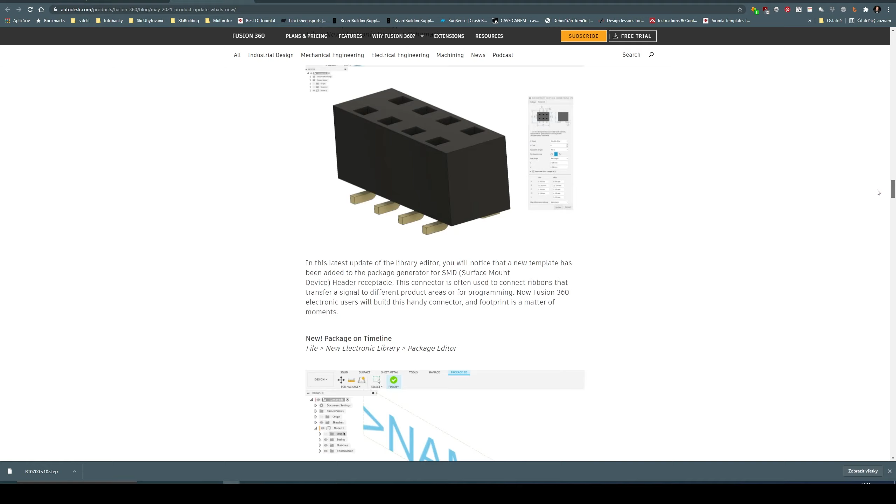Autodesk released a new update yesterday, 24th of May 2021. There's a new feature called machine simulation, which can be turned on in the preferences. In this video I would like to show you how to set it up for the WorkBee CNC machine.

So let's try to do it. What I got here is version 1 of Ooznest version 1 WorkBee. You can get this file from Thingiverse. It's just how it opens up after importing it to Fusion.

First, let's try to get rid of everything we don't need. Basically almost all of it. We don't need the plates. Just take it a step at a time. We can keep the plates, but definitely get rid of the nuts and bolts. Wheels we can keep.

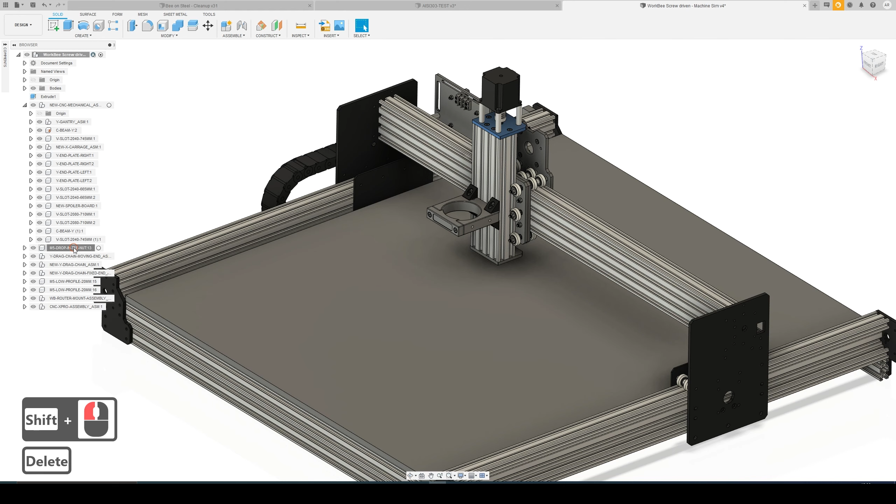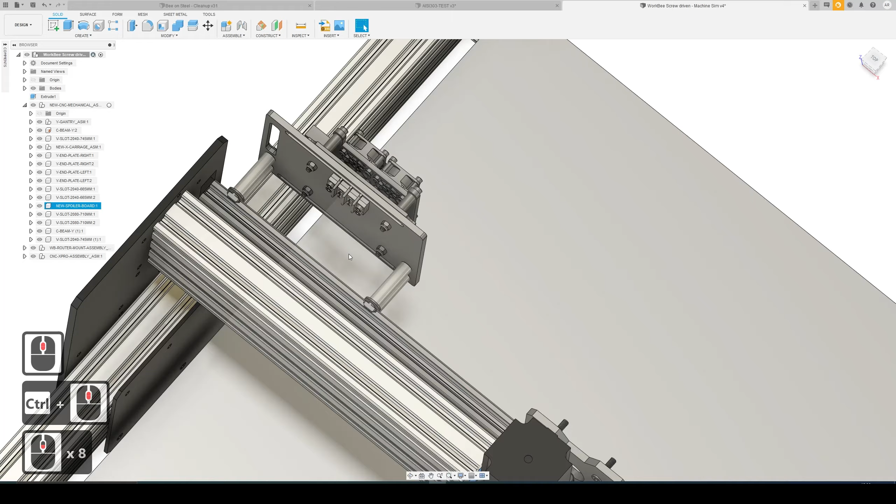V-slot, okay, and we can keep this. We don't need the drag chain or the bolts. Now, I guess the controller model is also not important for the simulation, so let's just get rid of it. So, the x-axis, some more wheels to get rid of.

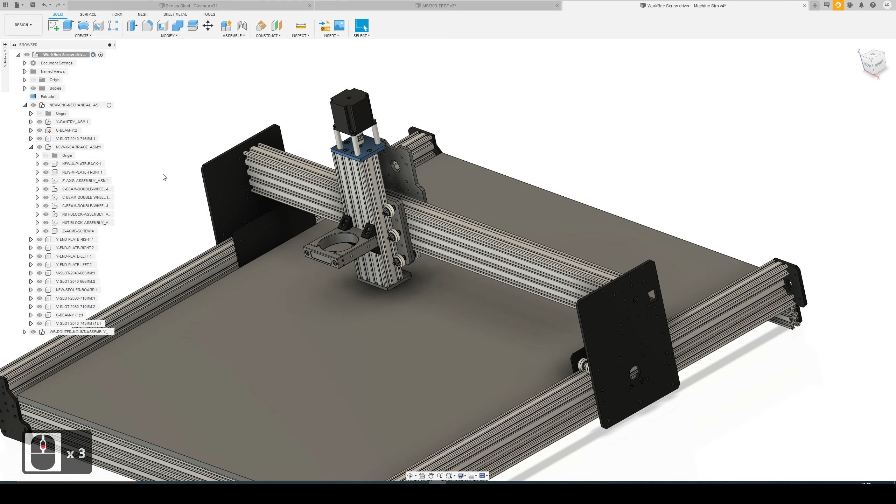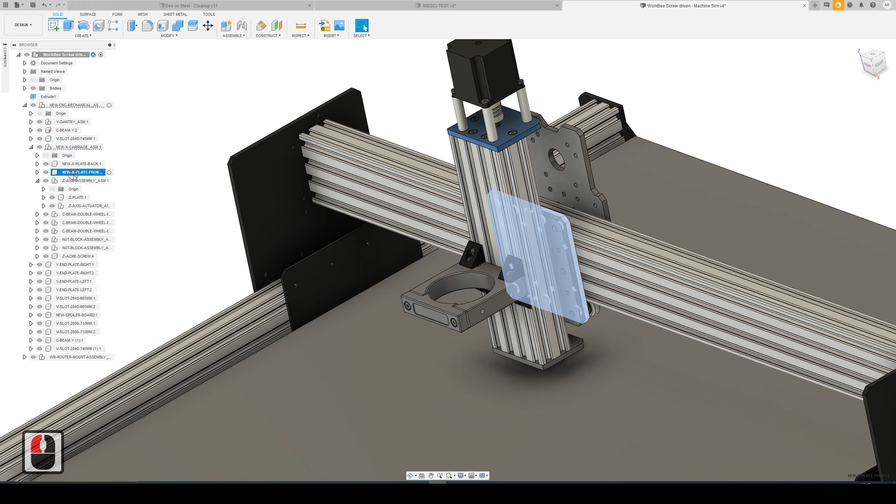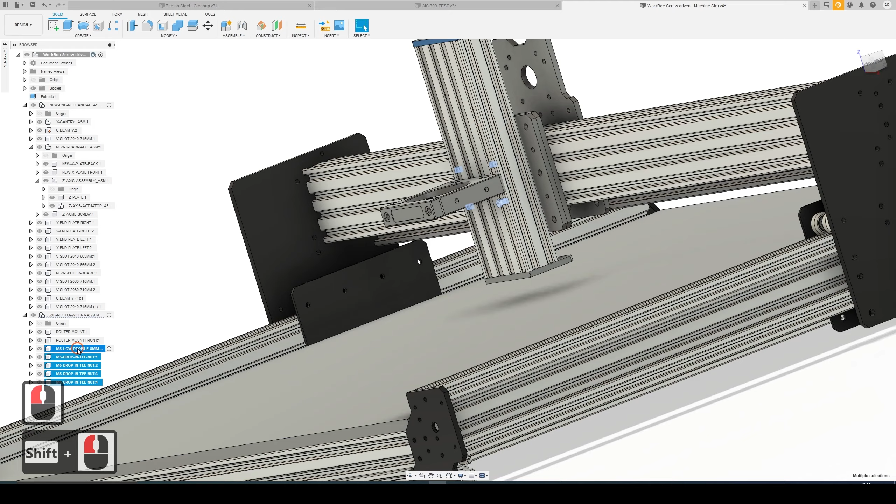This Z-axis assembly is the same. Don't need the nut blocks. More wheels. Okay, so let's ditch the bolts and angle corners on the router mount. Yeah, this should be okay. Oh, some more bolts here. Come on.

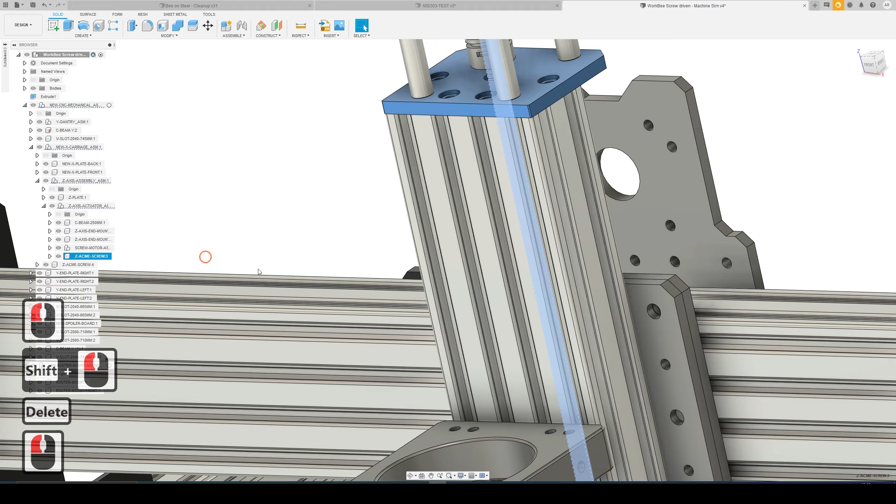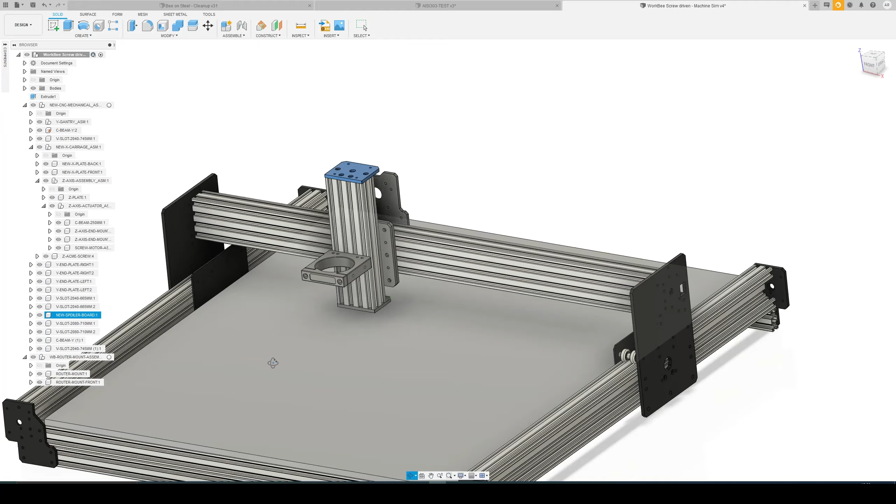Yeah, we don't need the bearings. Screw. Actually, don't need the coupler, or the motor, as it can't get in the way of the part. So, okay, looks good.

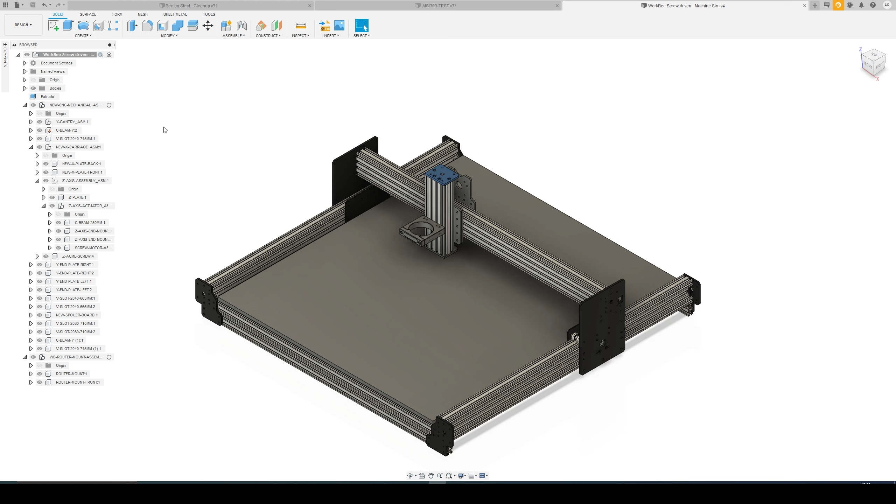Let's save this. So, with this, let's try to move it into the homed position, which would be, I guess, most people use the back right top. So let's see how we have this carriage, router mount.

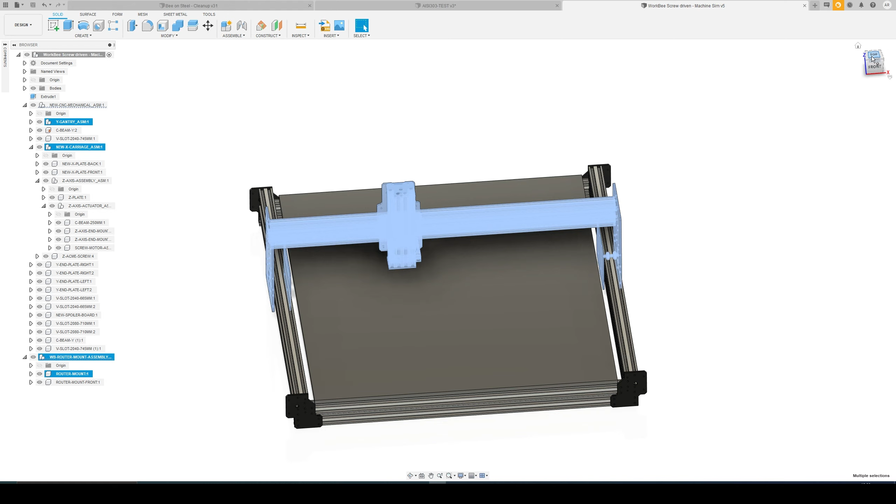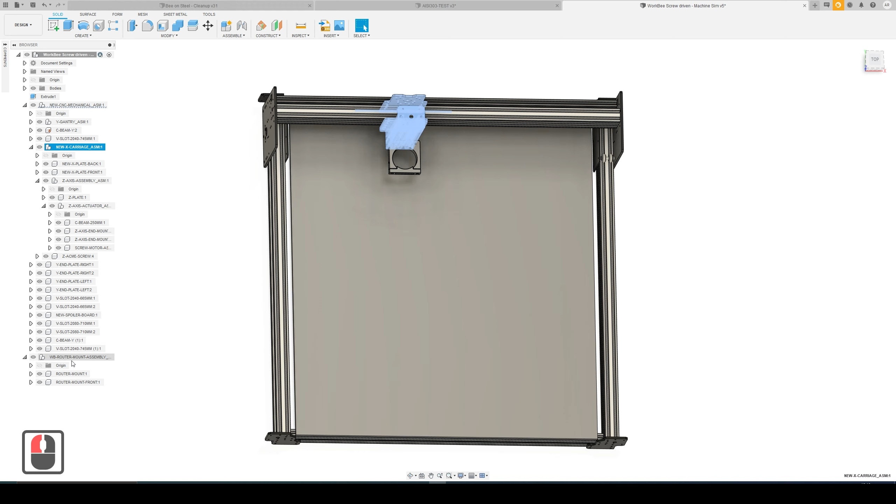So let's go all the way to the back. Now the x-axis, the router mount. Oh, let's move it right here. Okay. And it's just a plate.

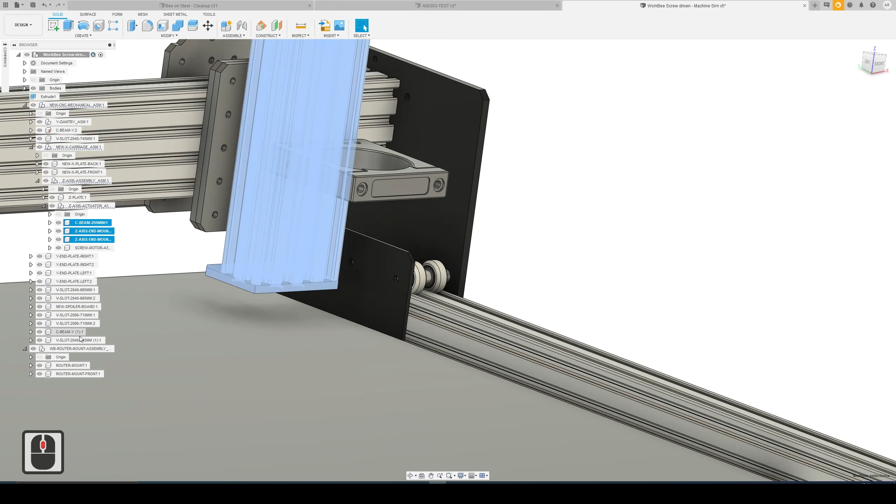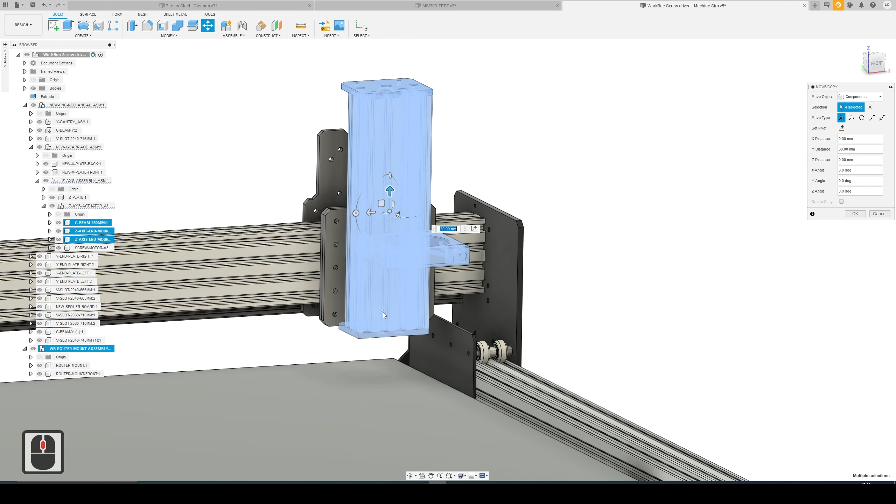This and router mount, let's move it up. Let's say like this. Oh, maybe it would be good to keep some wheels there for reference, but no problem, this looks good.

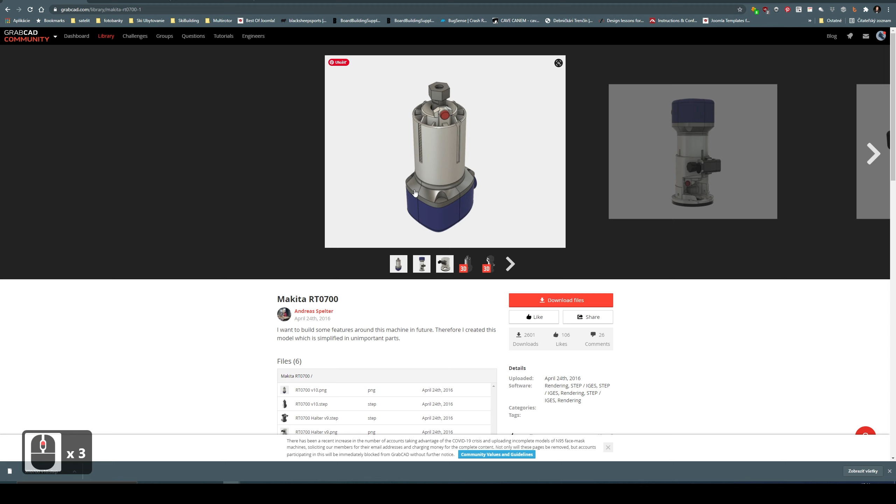Okay, now we need a zero. We need a router, so let's use a Makita RT0700 from the GrabCAD. I already downloaded it, so we can open it.

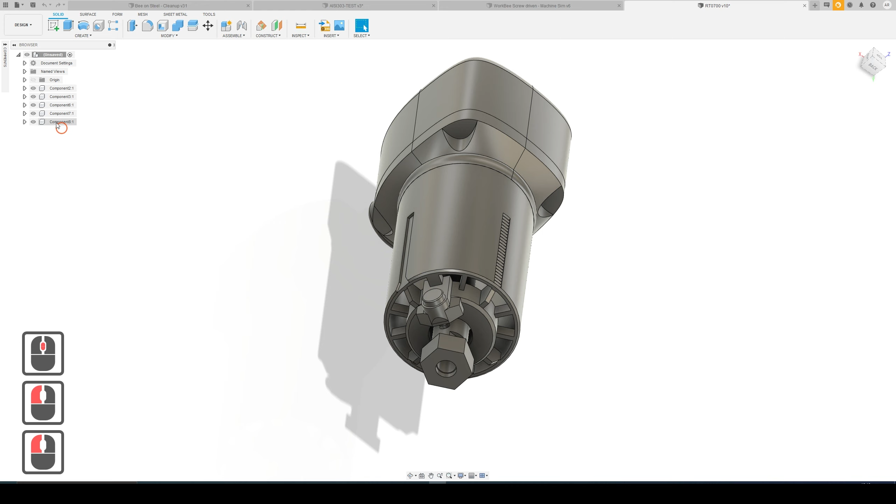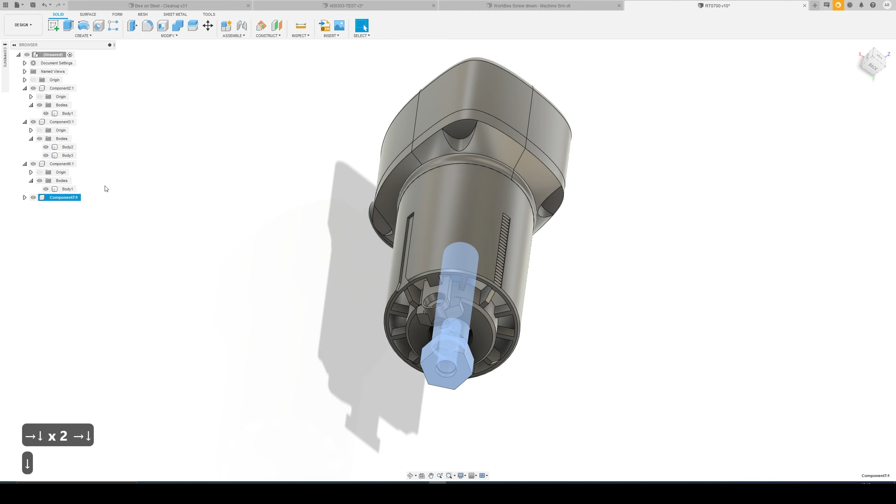Let's look at it. Okay, what do we have? So we don't need this. This is okay, it's okay. Yes, okay. Let's clean it up a little bit. Okay.

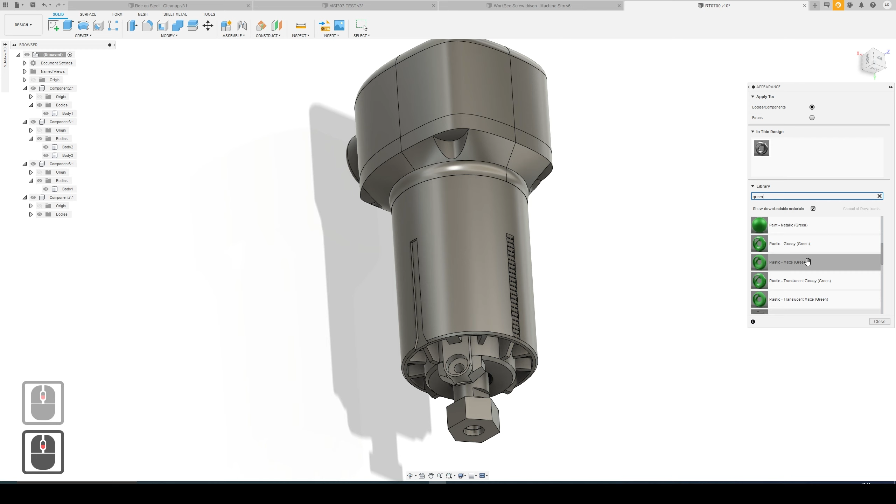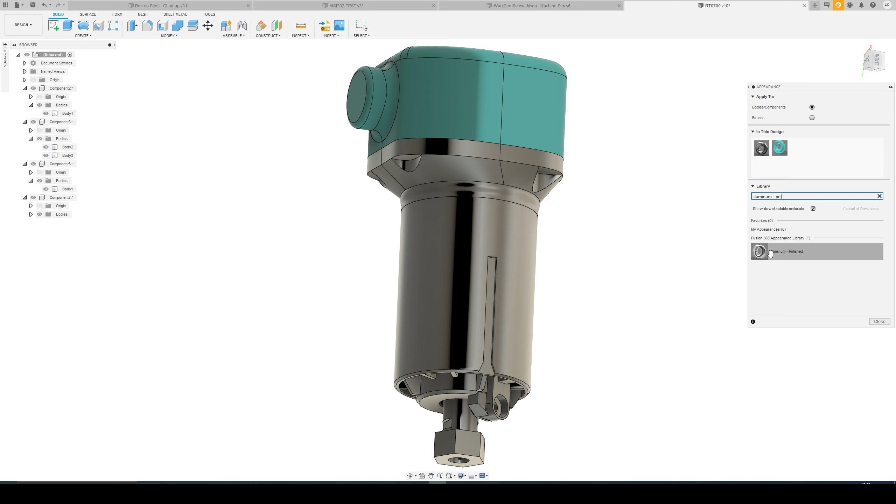Let's give it some nice colors. Plastic. This part is Makita colors, I don't know, something like this perhaps. All right. Polish. Yeah, let's make it nice and shiny. Cool. And for the shaft and nut, let's go with black. Alright.

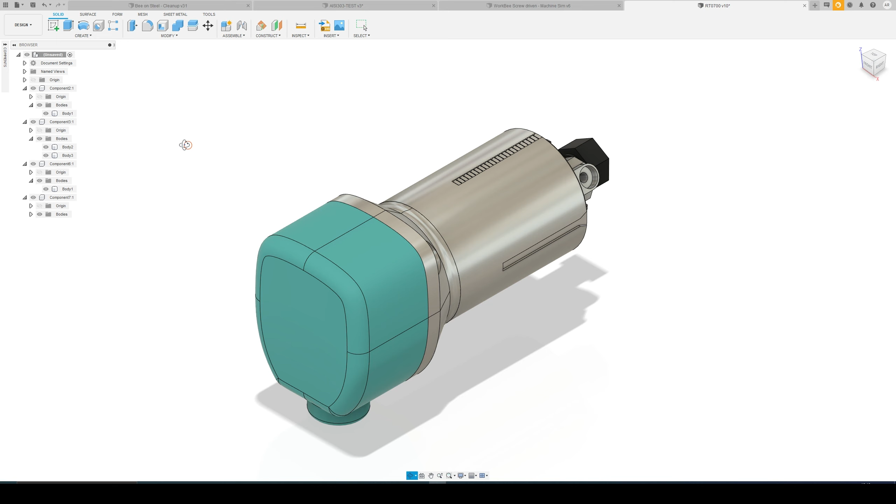What we could do is to simplify the part to make it so it is made out of not so many components or bodies, again to be able to select it quicker in the next step. So let's try to do it. Let's get this as the main part. If I combine parts and select the rest.

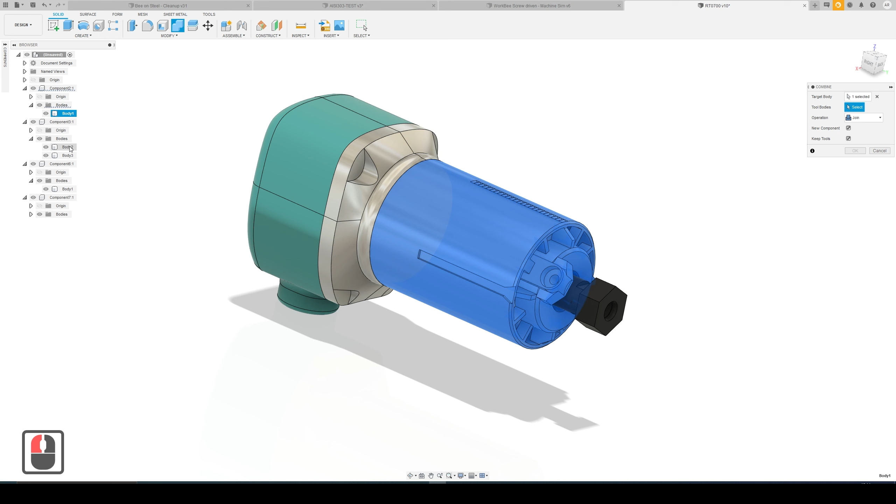Okay, that's all. Let's make a new component and keep the tools. Let's try to kill this. Oh, the colors are gone. Okay, never mind. Let's see. Okay, now we just got two parts or two bodies.

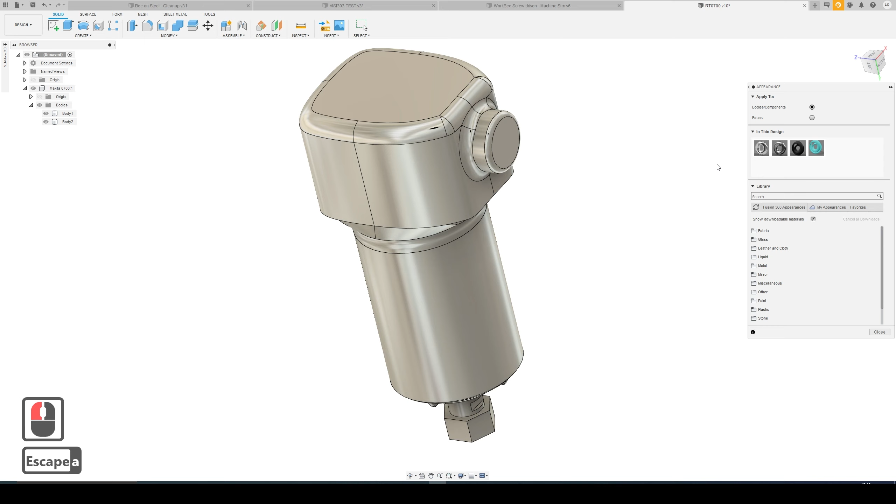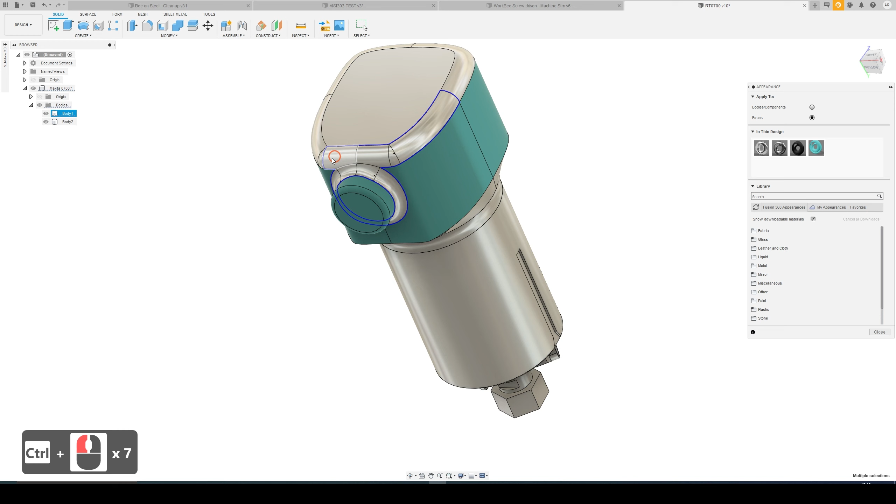Or we can do it like this. No. Let's apply the aluminum to everything. And now let's apply the green color. Nope. Hey.

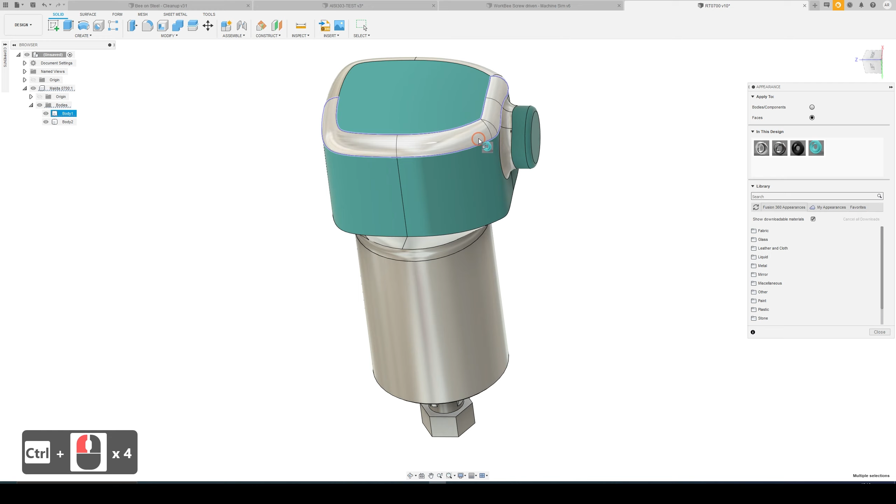Okay, almost there. Just a few more faces. Okay. That should be fine. And let's paint it black.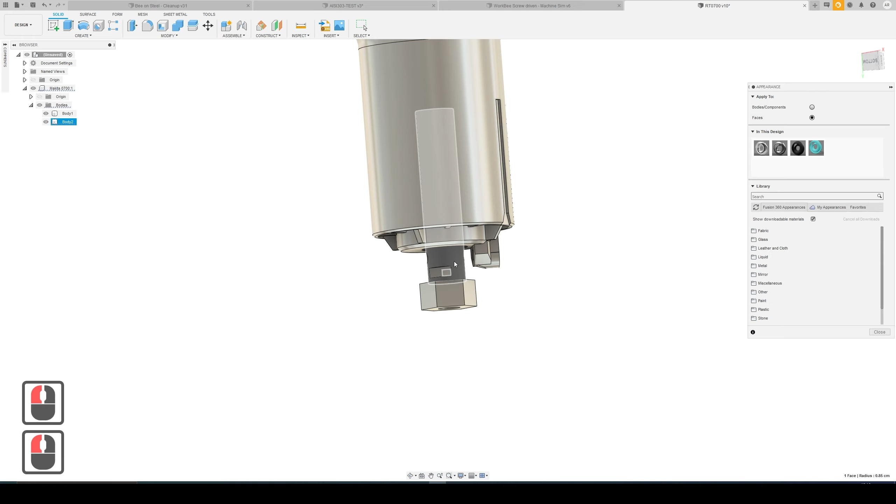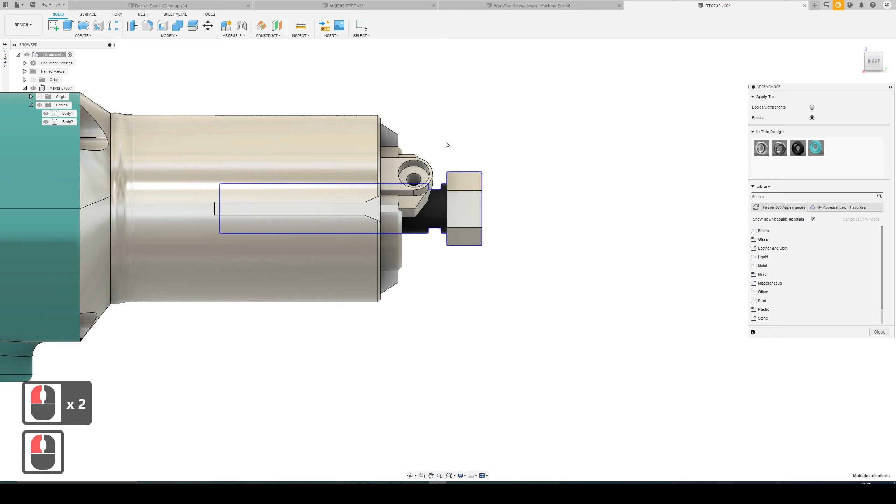Oh, actually, let's try it like this. Select selection filters, select faces. Ah, nice. That could have been quicker. So, never mind. So, I paint it.

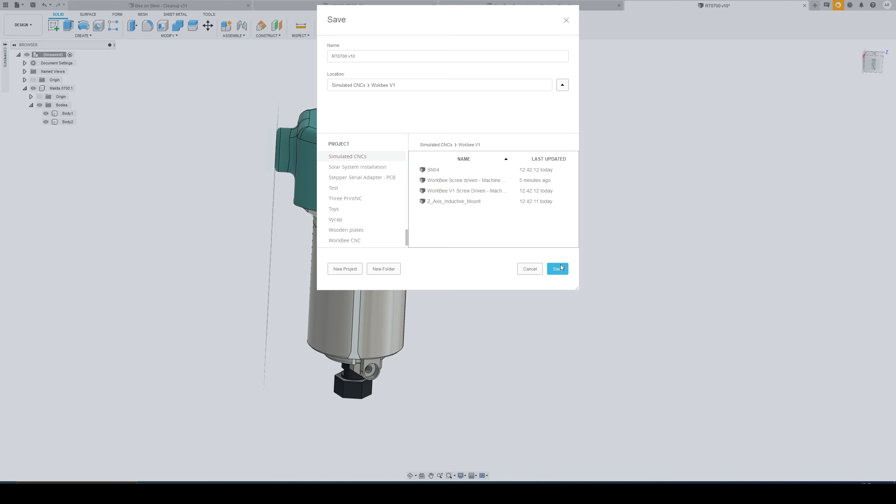So let's save it to the folder where the WorkBee is located. So the router is set up. We can now add it to our 3D model of the WorkBee.

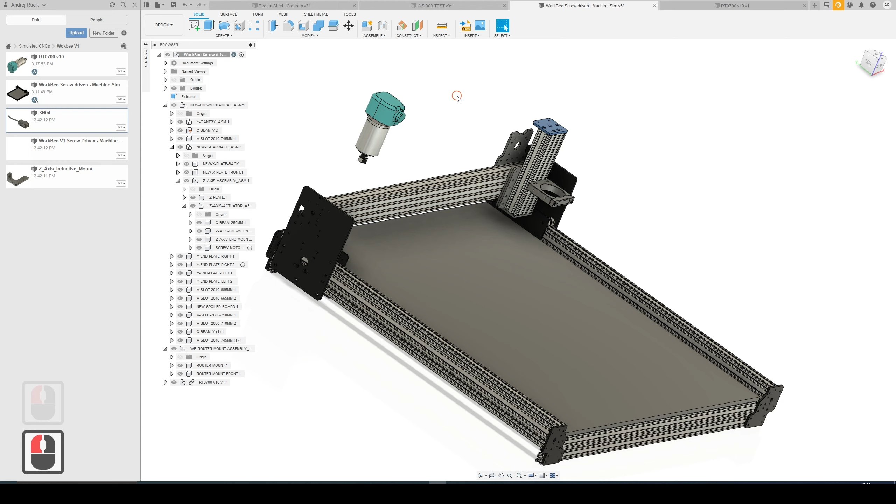Let's give it a proper orientation and let's move it to position. Might be a different model, or the router mount is a different kind.

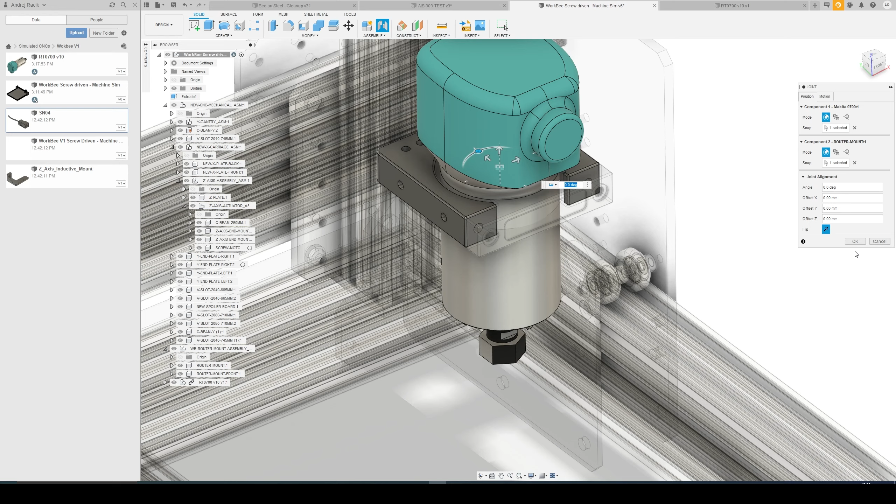I don't know, don't use it, so let's pretend it's okay. Seems about right. Okay, so now this part is done. Let's save it.

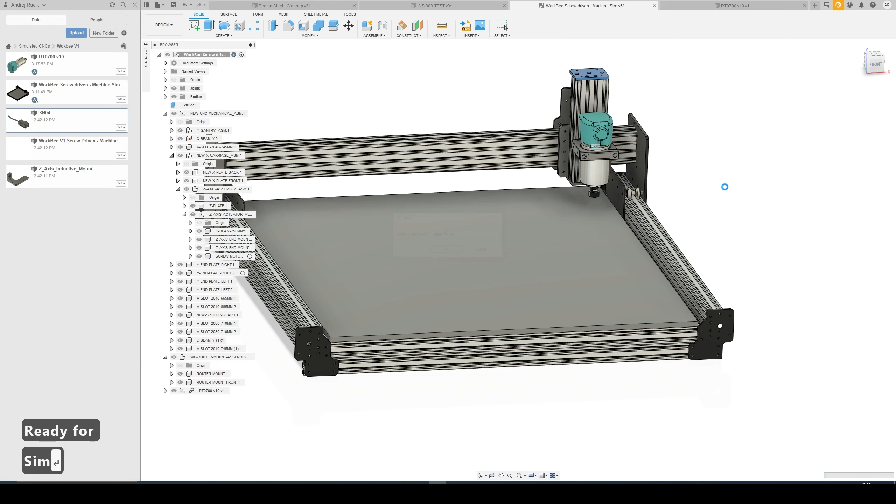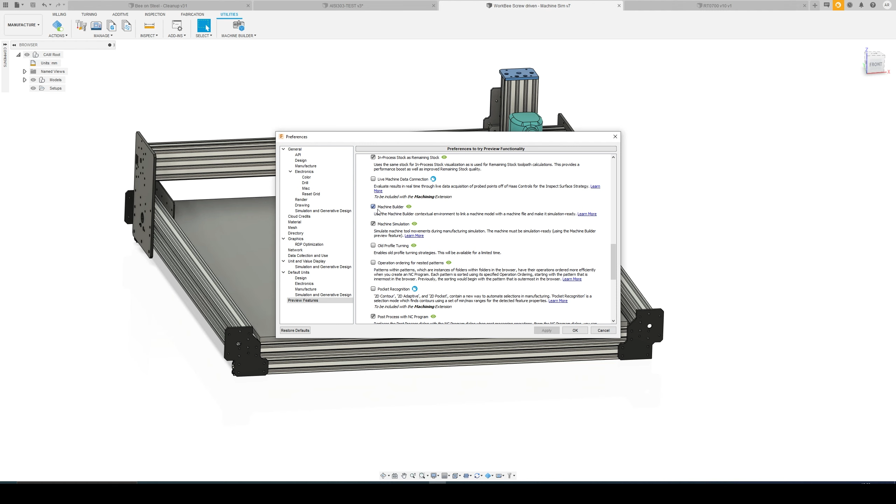Simulation, and now you gotta go into the manufacture workspace, utilities, and there's the machine builder. If you do not have this here, you should go to preferences, preview features, and you can find it here. Activate both machine builder and machine simulation. So with this you can continue to the next step.

So let's turn on the machine builder and select a machine local. This is the one I did before, so let's copy this and

You don't have to plug in any numbers in here, just the capabilities, tool changer, preload. We can deactivate this. We'll set this up later.

This is where you tell it how far each of the axes will move, so this has to be done correctly. The rest depends on your setup. So let's pretend you have some sort of vacuum and, I don't know, air blast.

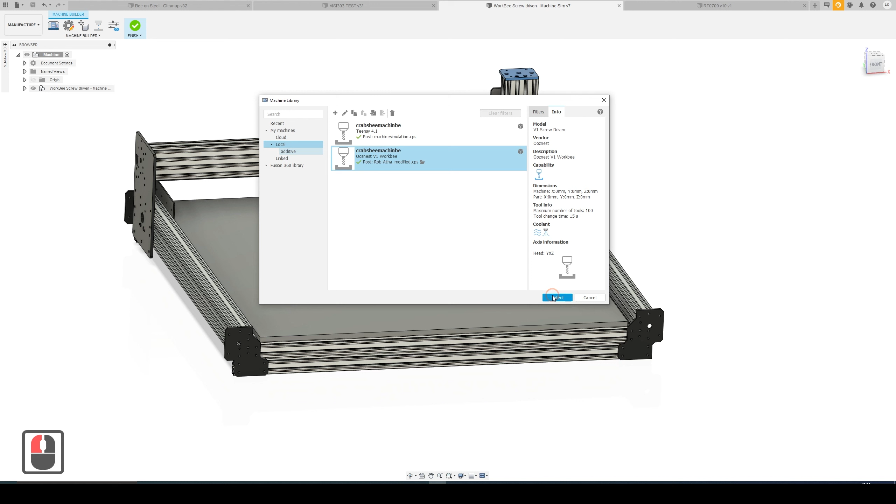But we have the name here and everything, so should basically be ready. So let's select what's next, version 1 WorkBee, and let's proceed. Now what you have to do is

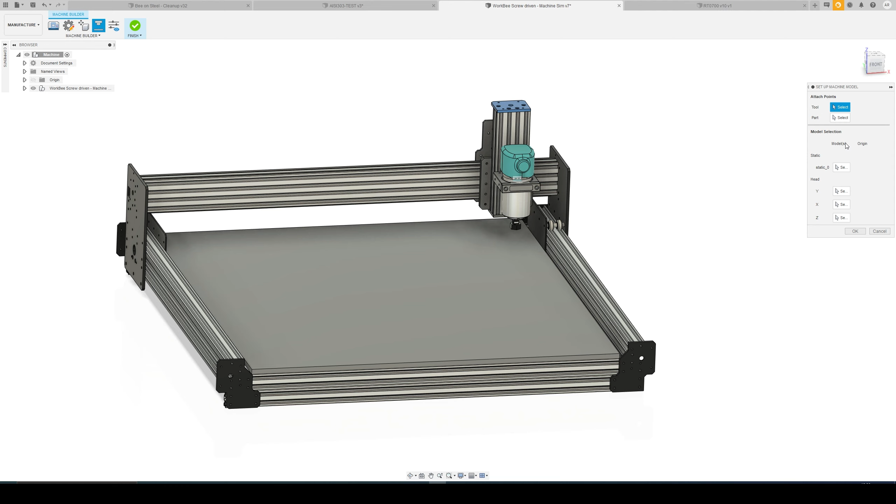set up the machine model. So this is where you select the parts which represent individual axes, and also the part and tool location. So as for tool,

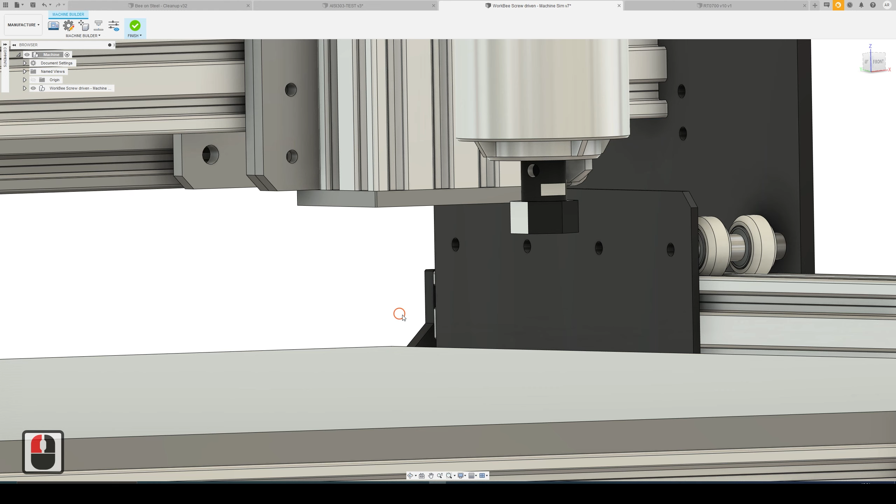can't hide this. Okay, you can see it here. So tool, let's go with this here.

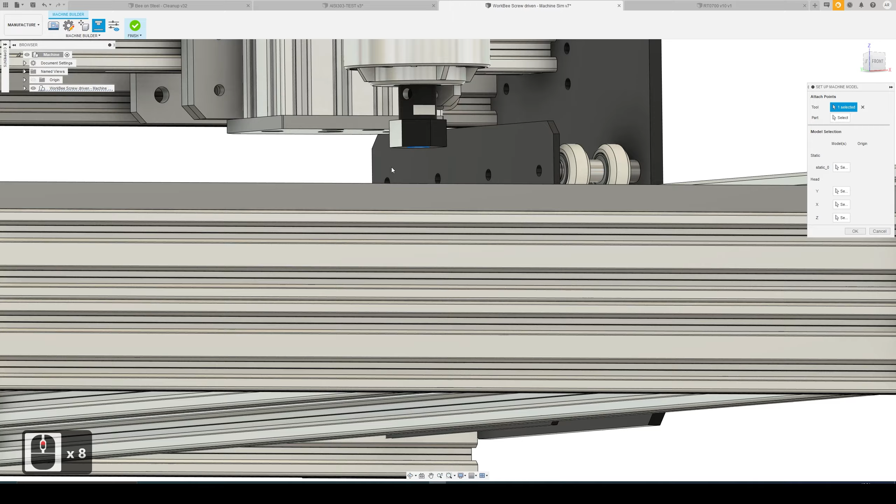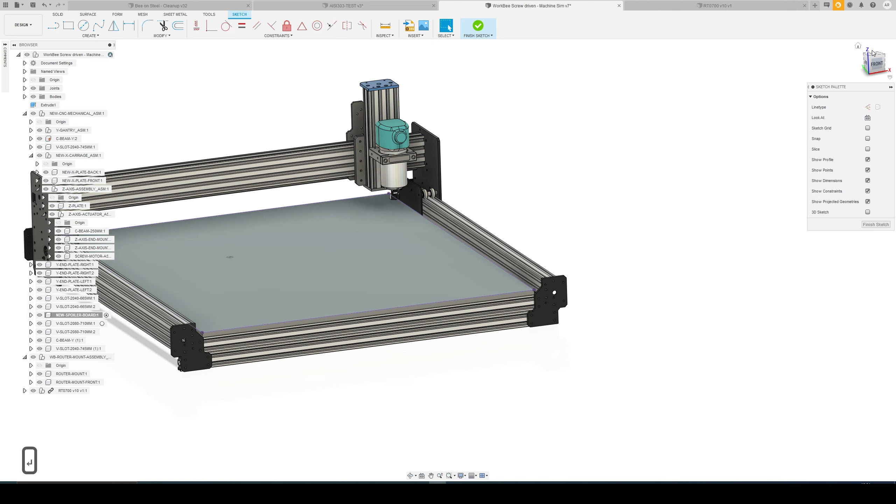For part, let's quickly go to design, spoiler board. Okay, let's edit this project, and you basically have to tell it where the location of the part in the machine is.

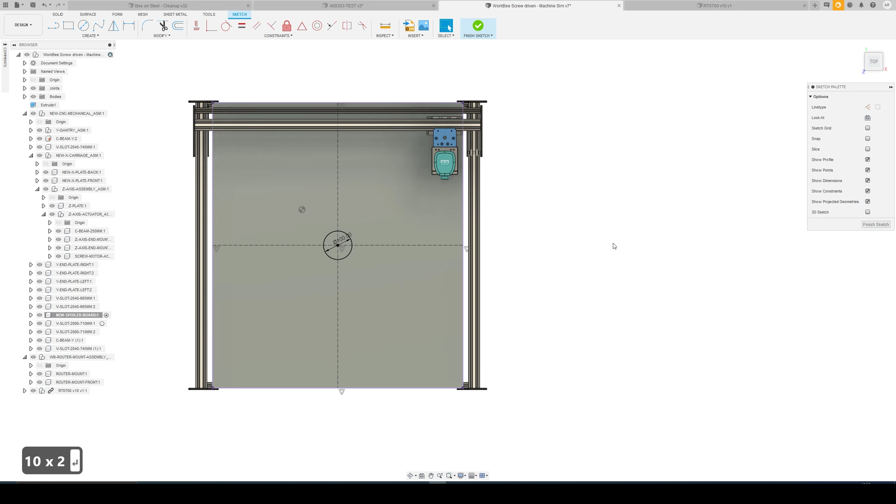So let's make a quick part. Okay, let's say it's gonna be located here. So back into the machine builder.

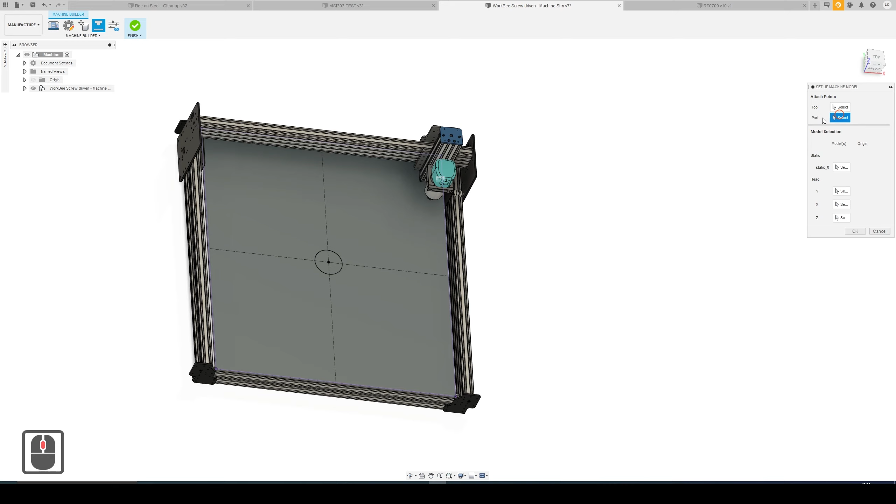I don't know. Oh, if it remembers the settings or not. But, okay, part. Can we select this? Yeah, cool. So,

okay, now static. This is where you select the parts which don't move. So basically the plates, the frame, steppers.

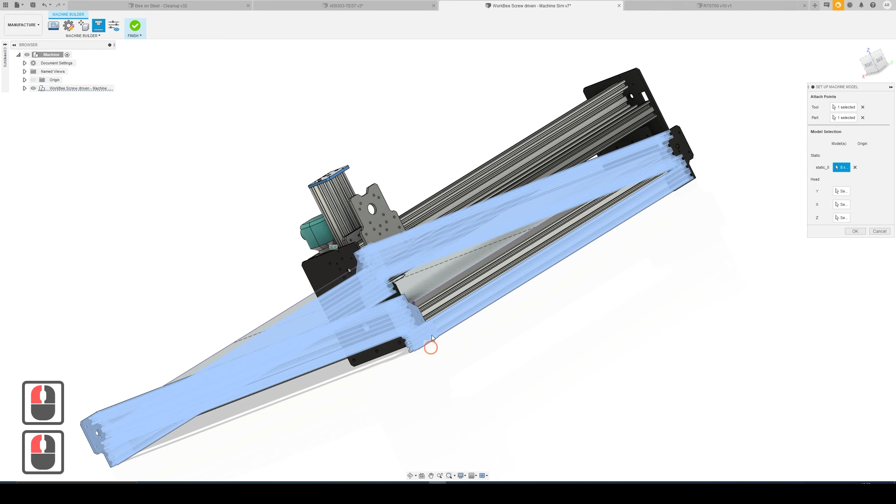Oh, come on. Really? Must be something.

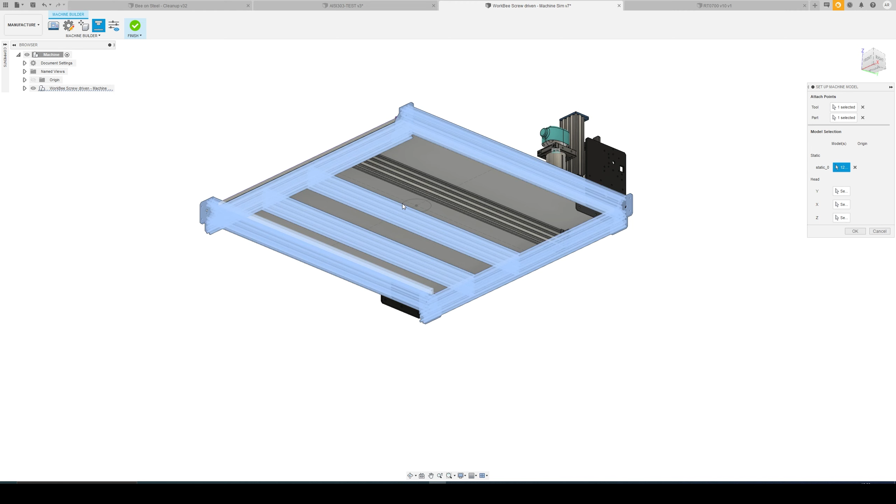Don't know why this can't be selected. Maybe there's something broken in the 3D model, so never mind, let's try without it. So now our z-axis is basically the end plates, the C-beam, the router, and this should be all. If you had a stepper on top, you'd need to select it too. So that's the z-axis.

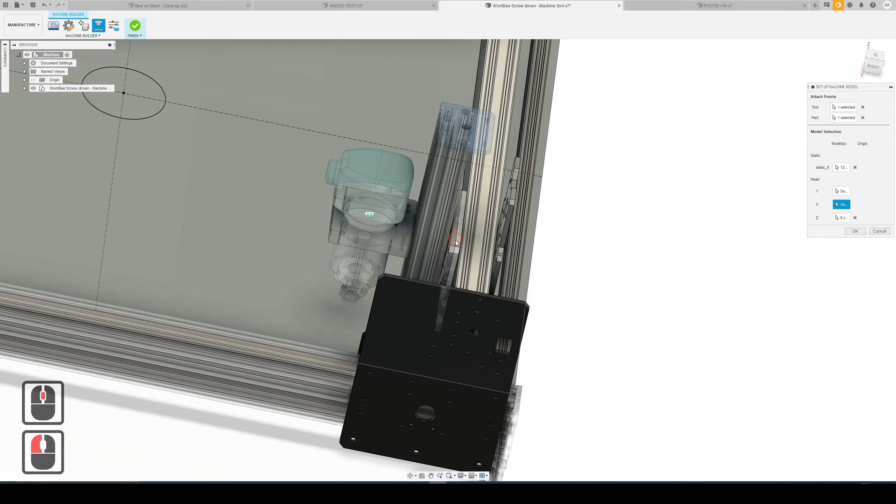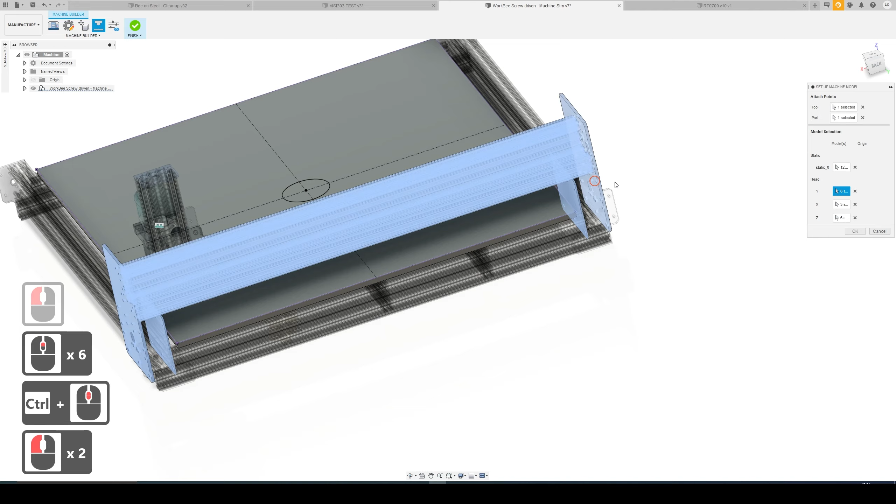Now let's go with X. Again, you have to select all the parts which move with the X-axis, and the rest should be the Y-axis. So it's just the plates and the X-axis C-beam, and that should be all.

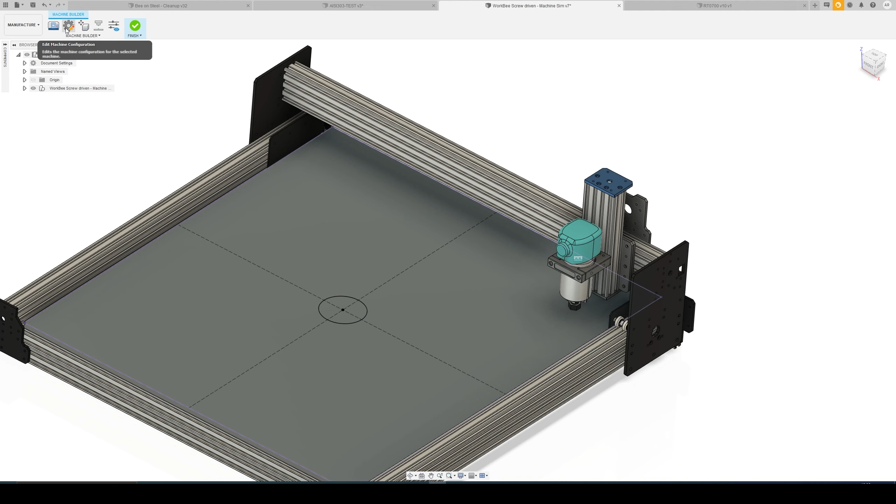Now you can preview the machine movement. It will probably go somewhere exactly, so we need to change the machine axis configuration. So we are at 0, let's go with negative 750. I don't know what the work area dimensions are exactly, you can check on the website, but it's not all that important now.

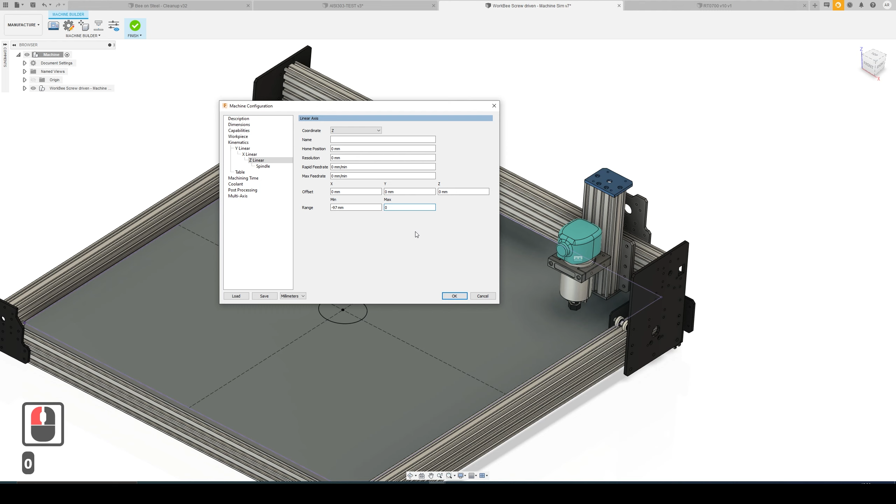So let's do the same here with the X-axis, and with the Z we should go to negative, I think it's 97, with the default configuration which you get from Ooznest. And let's preview this.

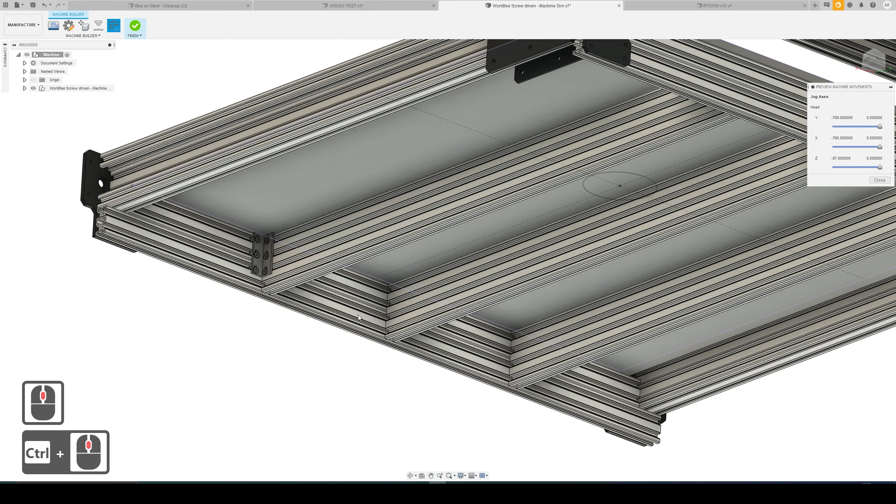Yeah, the spoil board configuration here is way too high, so you can always reconfigure to gain more Z height. There are still some parts which could have been deleted, but never mind. It appears to be working okay.

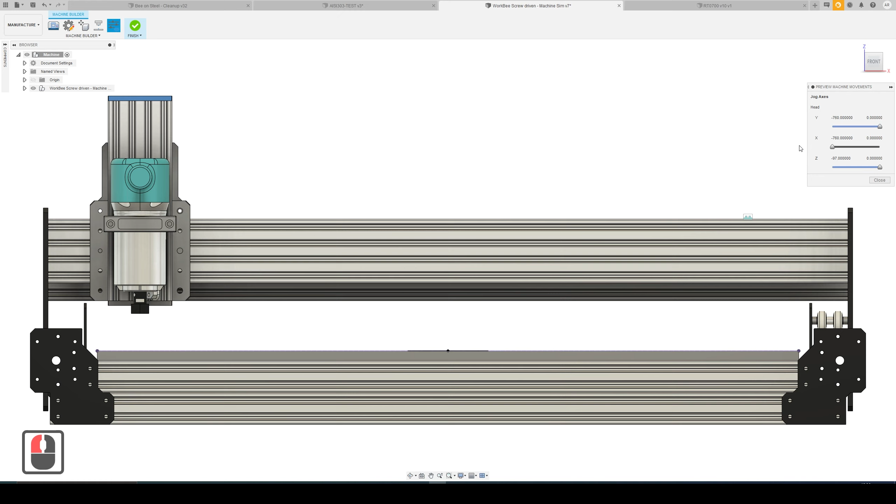So it was the z-axis. Now we got the x-axis and the y-axis. Oh, I forgot about the wheels. That's exactly why you do not want too many parts in your simulation.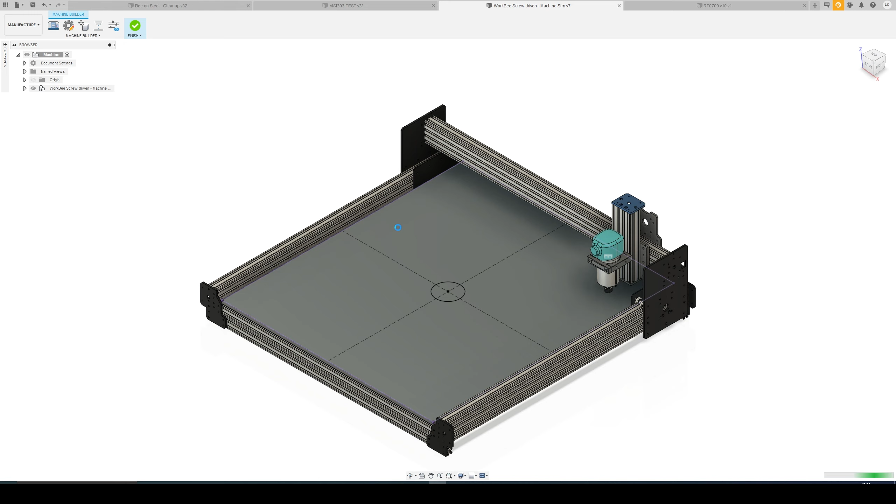Looks good. So now we finish this and update the machine library, and try to put some part inside the machine. So it's the other way around.

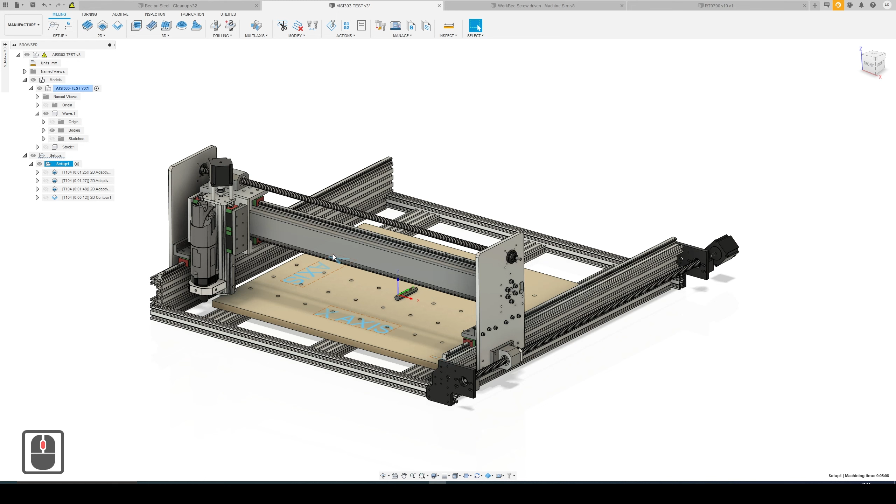So I got this part here, which I tried on my modified WorkBee model, but let's just...

Okay, so the thing is, you create a new setup. I'll just edit this one, and in the first tab you can select the machine which you want to simulate. So select the new WorkBee that just prepared, and that should be basically it.

You prepare the rest of the toolpath the same way as usual, and the part gets placed on the point you selected in the simulation setup.

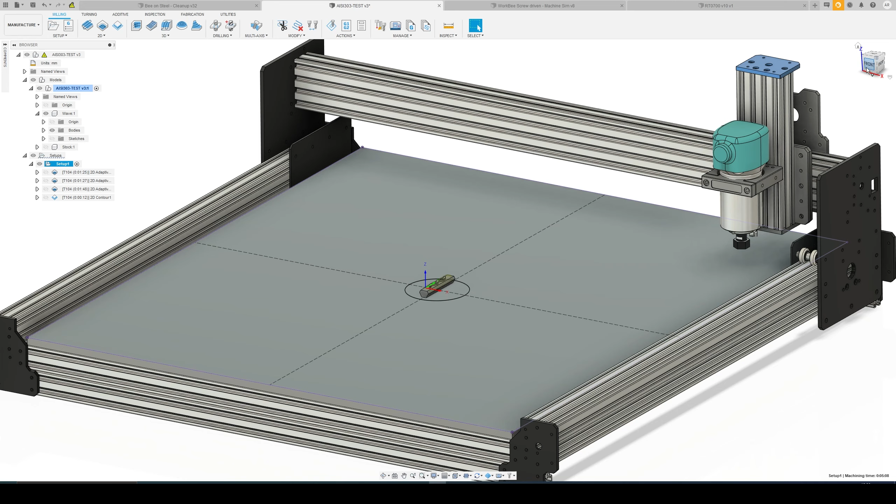So now if we can try to simulate, I don't know if the tool will fit, as there's barely enough space. Let's try that. Let's simulate it. Oh, yeah. Yeah, let's just do it.

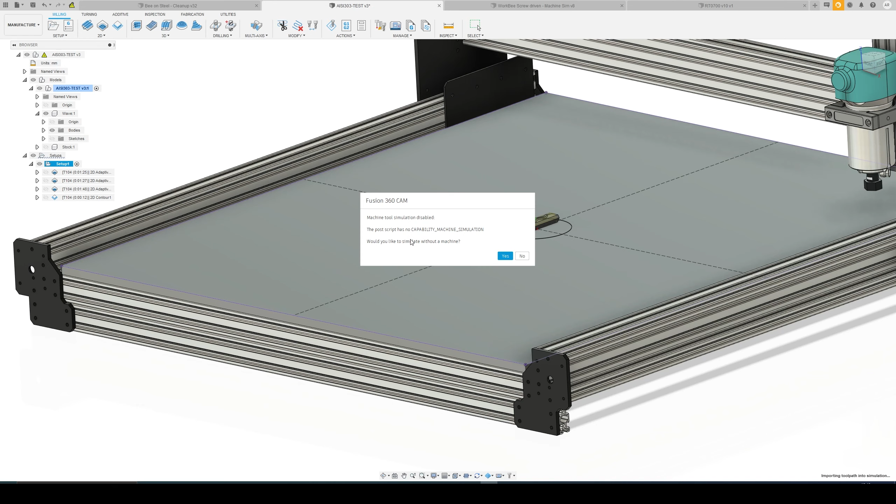Okay, so it seems the post processor has to have some simulation options enabled. So for the purpose of this video, let's use the one from Autodesk, which works.

So I reconfigured the machine, or this WorkBee, to use the machine simulation post processor provided by Autodesk, and again in the setup, select the machine which you want to use. So you got the model, your toolpath, and in the setup it shows the machine you selected.

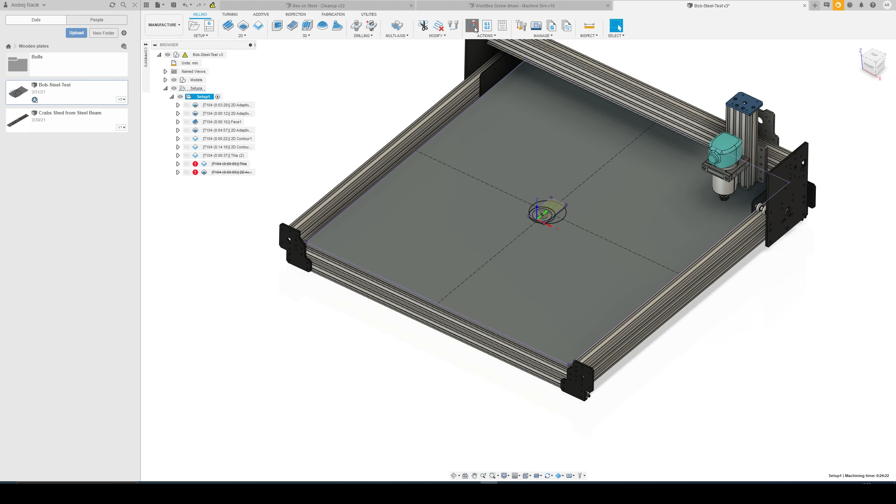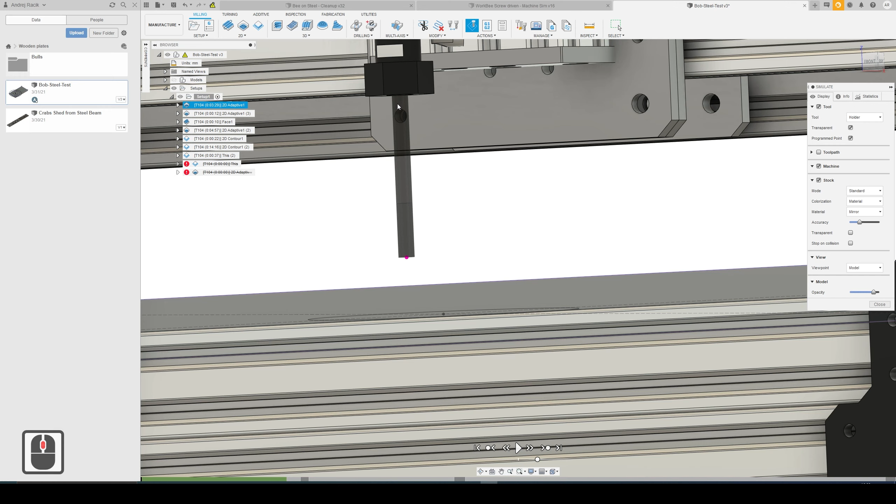There seemed to be some other bug, or maybe I did something incorrectly again, but when I run the simulation the whole machine moves. I don't know why, but it does position the tool correctly over the stock, and will run the simulation of the toolpaths together with the simulation of the machine. I might have the tool incorrectly set up, but that's just another thing I need to check upon, how to set it up properly and correctly.

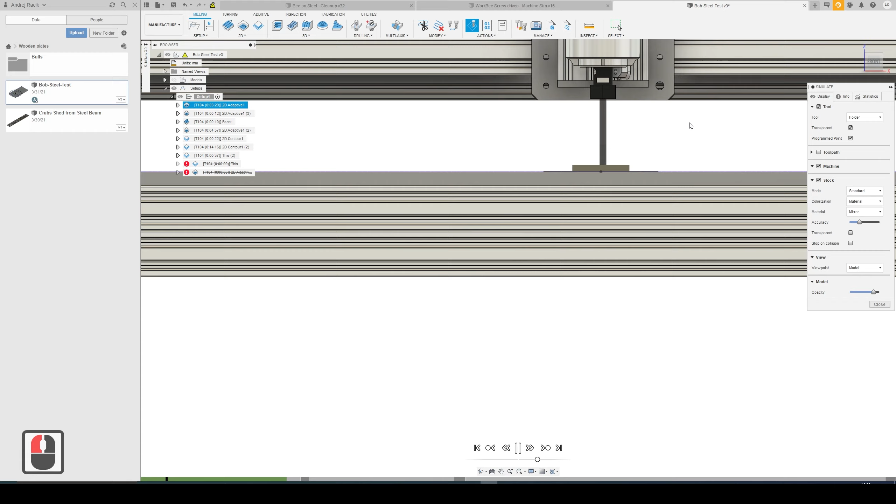But for the purpose of this video it works. So you can see it does run, although the z-axis is a little bit too high up, so if there were wheels it should not move so high up.

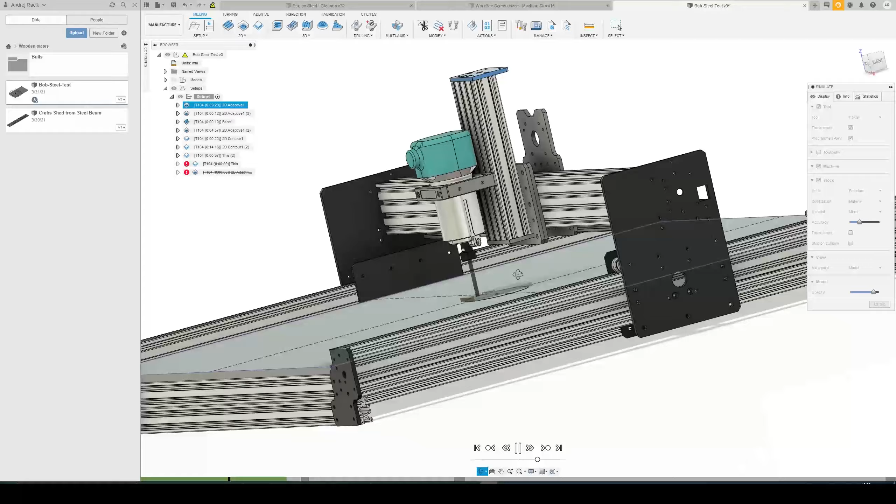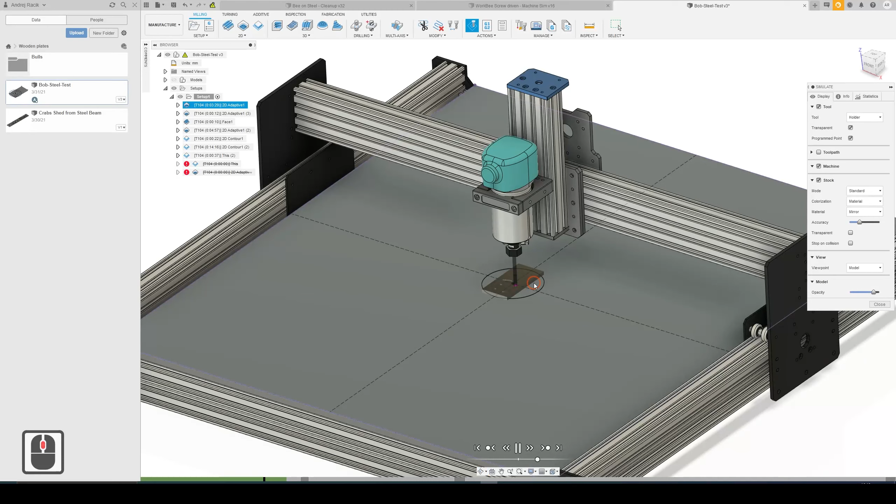Again, I don't know all the options and stuff that needs to be set up, so I just wanted to make a quick video and show how to set up the basics, and hopefully I can figure out the rest later on, or just wait for some videos from more experienced users and learn how to do it properly. So thanks for watching, and if you're going to try to set this up, then good luck with it, and see you next time.